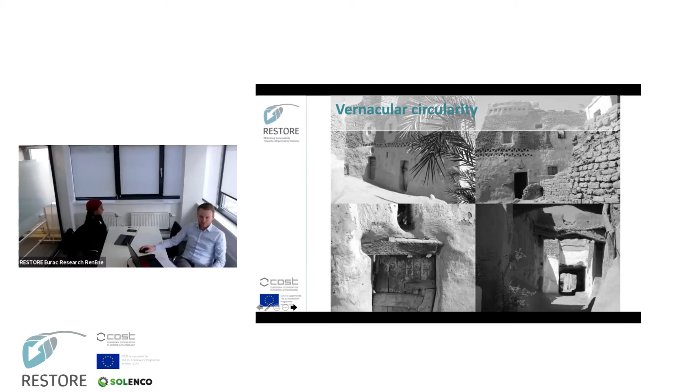in old times, people used to build with what exactly is there under their feet, as Hassan Fathy, the famous Egyptian architect, used to say. They used a lot of bio-based material from agricultural waste, from farm lands, in order to construct their buildings that along centuries proved to be economically also friendly and affordable to build, cope with the local climate, either it's harsh, hot climate or even harsh cold, if we talk about the Nordic context, for example.

The buildings were always designed to be able to be reconstructed again, even after demolition, or if it's the time for end of life of the building, or it is just deteriorating naturally. It is possible to reuse the material again. For example, in this picture, it's just an earthen building constructed out of mud brick, adobe bricks. If we demolish it today, tomorrow we can reconstruct it again from the construction waste. You use a little bit of water again to just remix the construction rubble, and then you will be able to cast again mud bricks.

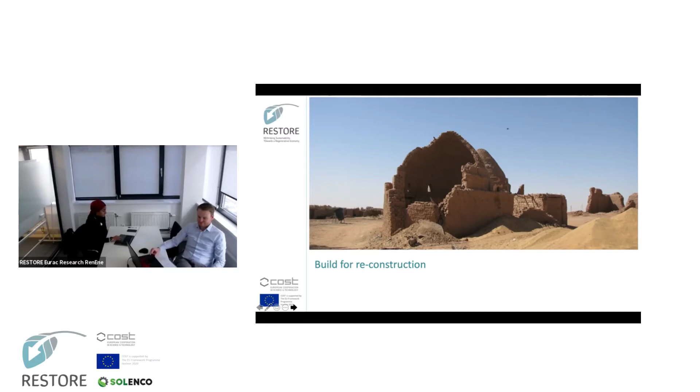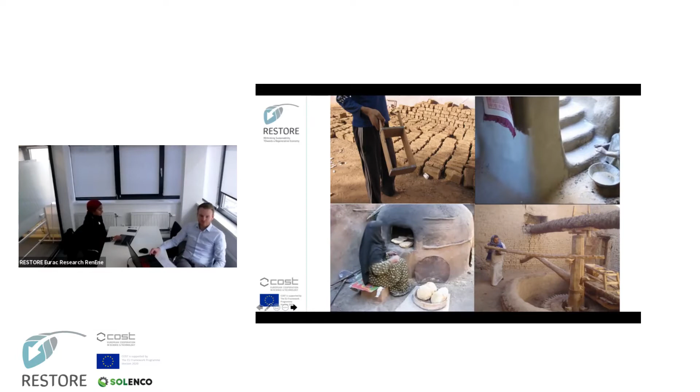So they gave us wonderful examples in old times on how we can recycle, upcycle, reuse all of our building components. And actually, the communities there were self-sustained, self-sufficient. They use what is available around them to carry on their daily living habits. All the building material, as we said, are resourced and brought from the local environment.

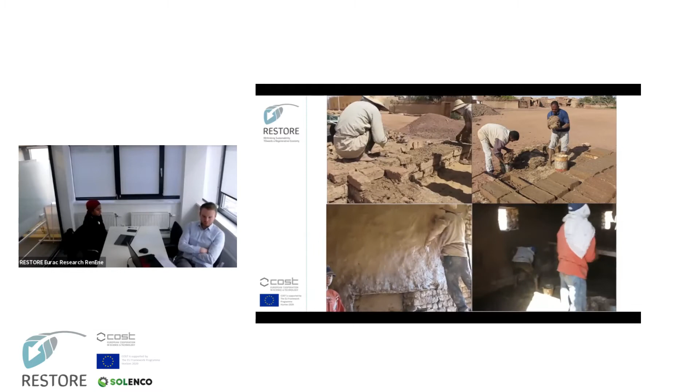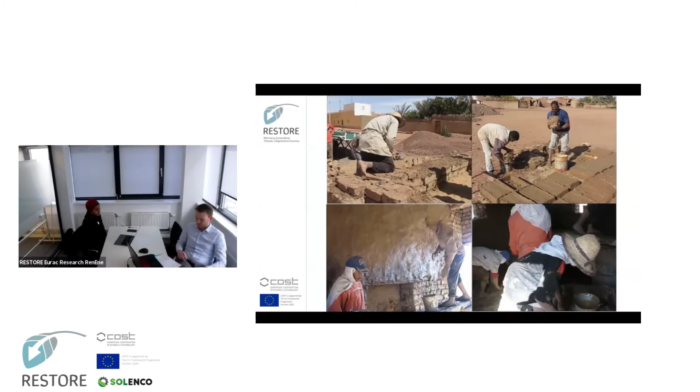As you can see here, it's somehow labor intensive, and that can be one of our challenges that I will talk about later. If you depend mainly on man hours, especially in the European context, I would say it's even more challenging in the Swedish context when man hour is extremely expensive. But here we can see at least the way that in old times, they used to construct their buildings, it's possible to reassemble and rebuild again. All the building layers is possible to, like when it's demolished, it's really possible to bring it back again to life as a new construction with the same basic raw material.

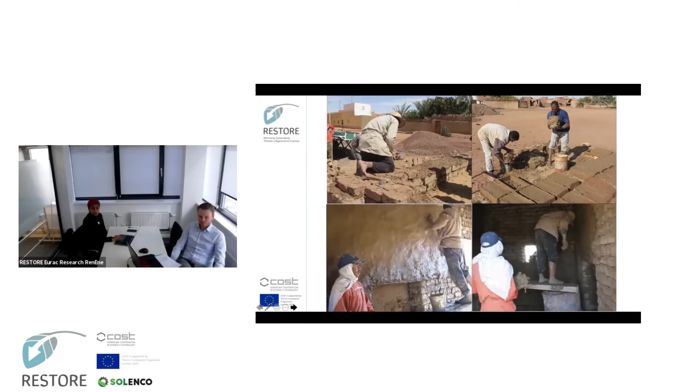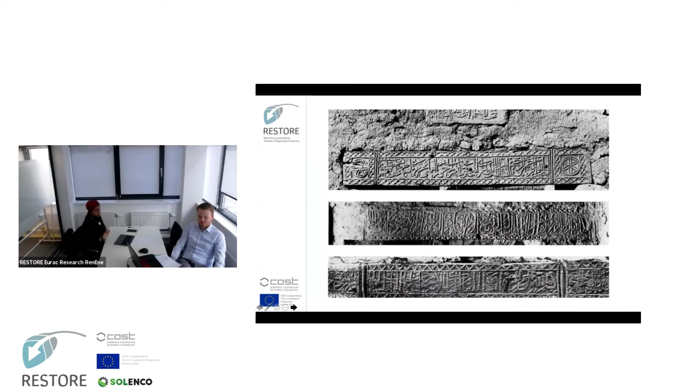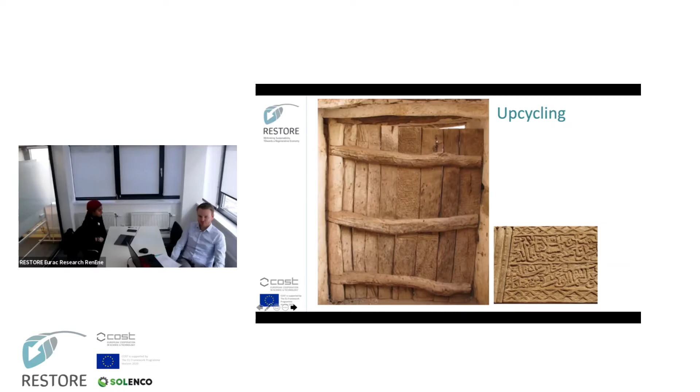So it's almost zero waste construction technology. When a building is about to be demolished, every single component can be upcycled in different ways. This is a very simple example: a door lintel. If it's possible, it can be reused again for the same purpose. If not, it can be upcycled in a different way, like using it to design a wooden door.

A palm tree, for example, is not just a source for food, for palm dates. It is a construction material. It can be used for primary beams, secondary beams for roof construction, for doors, windows, and supporting beams for walls or corners. It can be used for furniture, and even the leftovers from cutting and trimming the palm tree trunk can be weaved and used for different household elements. So definitely it's an example of zero waste thinking.

From one material again, this is just earth. You can construct a house, you can construct storage containers for crops to keep them fresh for a long time in different seasons. You can use it for interior furniture, for shelves, cupboards, built-in sofas and built-in beds. You can even make an oven or a cooker or different kinds of utilities.

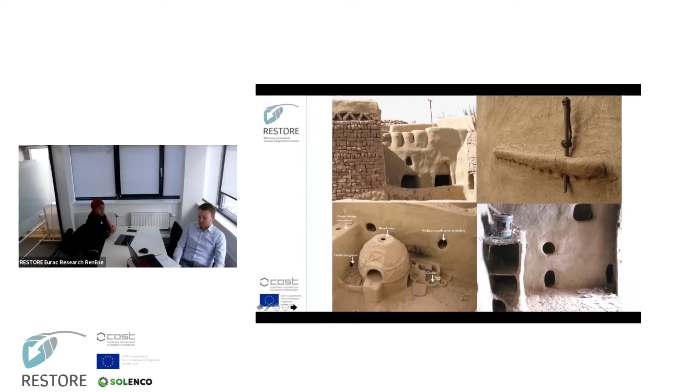A waste is not a waste. Organic waste in old times can be used not only as fertilizer for agriculture, it can also be used as fuel. This is organic waste or animal manure that can be used as dung cakes as fuel for furnaces.

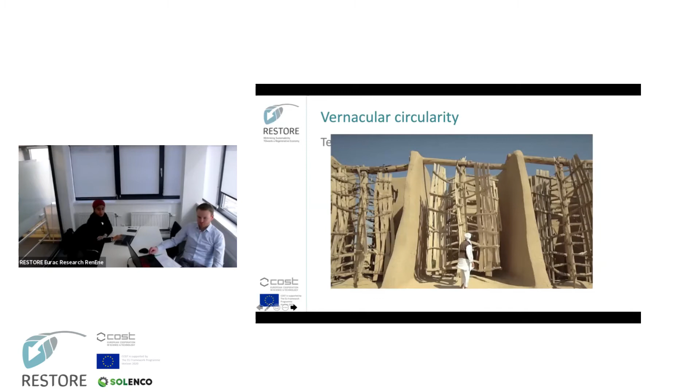When we talk nowadays about renewable energies and how we should use different natural powers to generate electricity for our buildings, in old times it shows us this kind of circular way of using natural powers, and this was the very initial thought for windmills and wind turbines.

But nowadays, we think a lot about design for reconstruction, design for rebuilding, and design for disassembly. But if we look at the enormous amount of construction waste that is already there, all the time we think of new, but how about the old, and how about existing buildings, and how we can reuse all this construction rubble.

Sometimes it's really hard to recycle. It's also a lot of energy consumed, a lot of embodied energy and embodied carbon still in reusing this kind of construction rubble or waste. Sorting construction waste is also time consuming and energy abusive. However, it's better than producing new material. So it's a little bit less bad, as we used to say, but we still need to do more good, as the slogan says here.

Since we started this event as a main objective for RESTORE agenda, so some ugly facts: unfortunately, in the EU alone, the construction sector consumes 1.6 billion tons of materials annually, especially steel, plastics, aluminium, and the biggest consumption is for cement. Of course, there are a lot of initiatives for producing eco cement or environmentally friendly cement, but still, if we try to minimize the use as much as possible, that's even better.

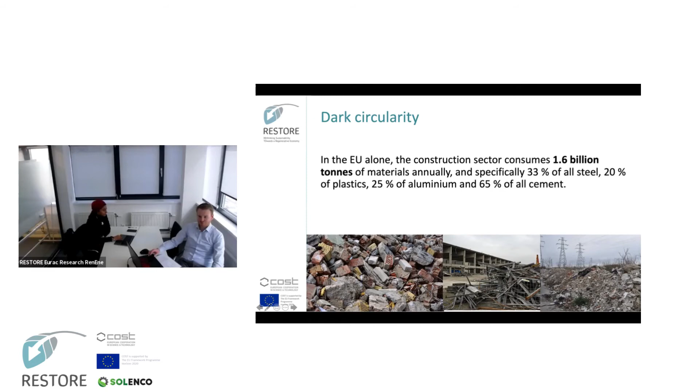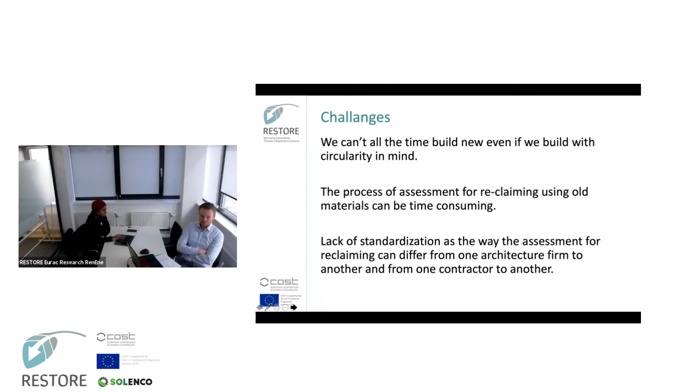So some of the challenges we still face: it's hard to build new all the time, we don't have this luxury. The process of assessment and reclaiming old material can also be time consuming. We still lack standardization, as the way to assess reclaiming material can differ from one architecture firm to another, from one contractor to another, and that also differs from one country to another. There's another challenge when it comes to building codes, regulations and standards. It's sometimes very rigid and really hard.

I will share a little bit now quickly about a recent project when I tried to build with straw, clay and reeds in Sweden.

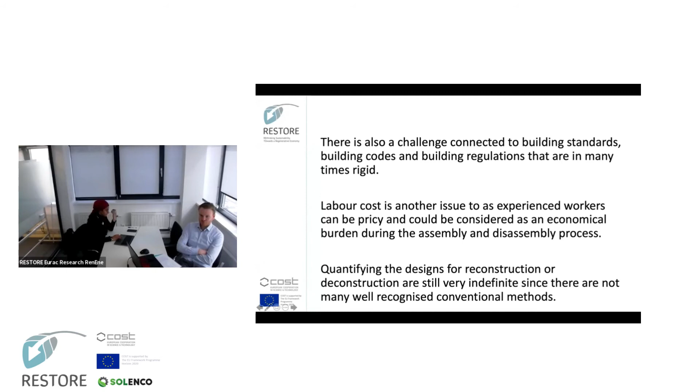Quantifying design for reconstruction and deconstruction is still sometimes a very indefinite sense. There are not too many well-recognized conventional methods for doing this. I'll also mention the labor cost quickly, it can be really costly if we depend on this kind of design for disassembly to reassemble our buildings manually.

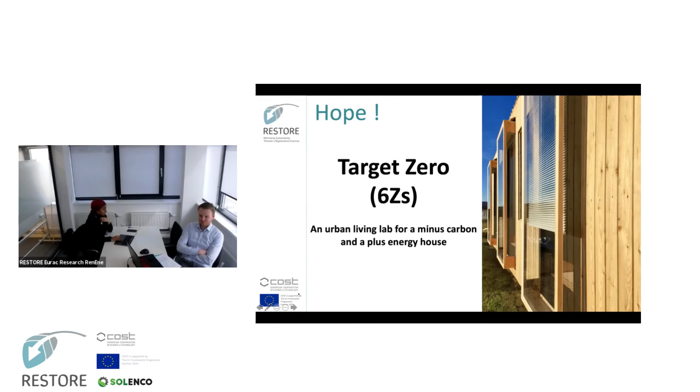That's a little hope at the end of the dark tunnel. With this, there's a small and humble contribution in designing. At that time I called it the 6 Z's target: zero carbon, zero energy, zero indoor air pollutants, zero cost if you do it yourself, zero impact on the environment after end of life, and zero waste as an outcome from this building.

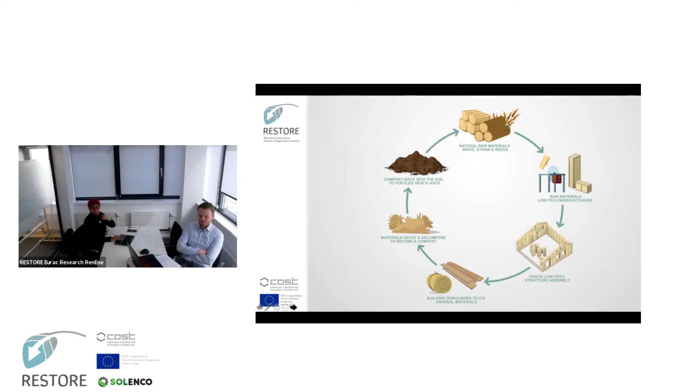So the idea is to use locally sourced material around the building site, earth, straw, reeds, and wood, to construct a refugee house based on the idea of design for disassembly. All the materials are sourced from the nearby farmlands at the project site.

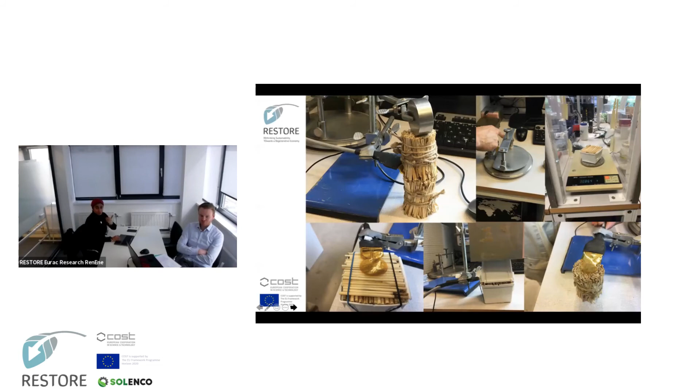A lot of lab testing has been done to make sure these materials are safe and good to use, because at that time I couldn't find any standards in Sweden that say you can build with straw and reeds safely, and how that complies with energy efficiency standards.

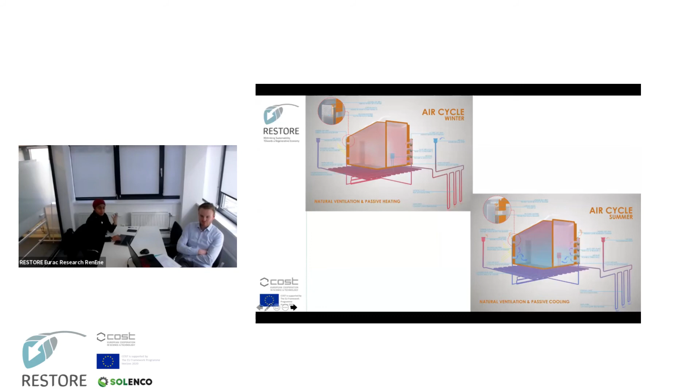All the passive systems in the house depend mainly on passive means for heating, cooling, natural ventilation, and daylight. A lot of passive systems were used, like trombe walls, green walls, and air heat exchangers. All the waste from the house is recycled.

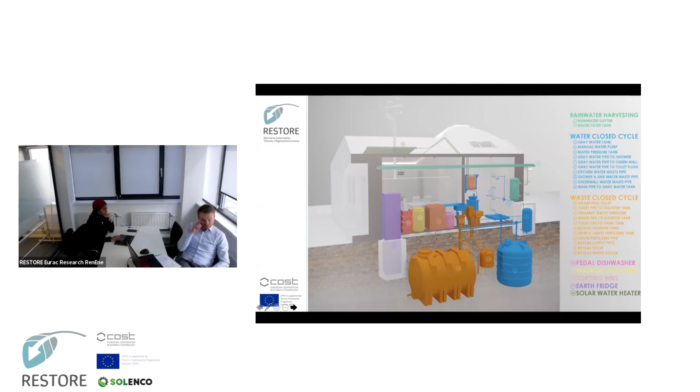The organic waste is used as biofuel. All the water is separated, gray water and black water, to be reused again for different purposes. Even if there is excess wastewater, it is treated and goes to the sewage system clean, even better than if it were just dumped in the sewage system.

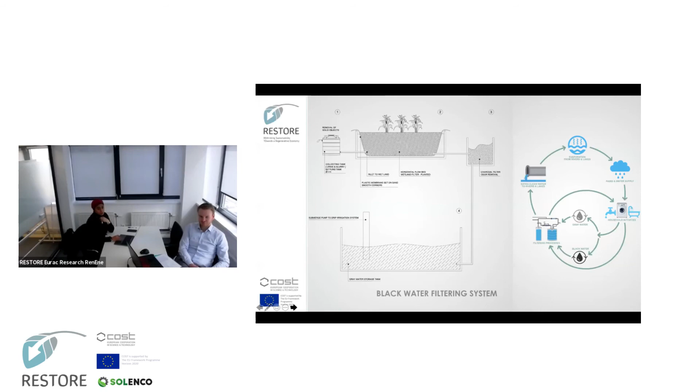In Sweden, we still have about 20% leakage in the waste system, so even if there is leakage, it's still kind of clean water to be used.

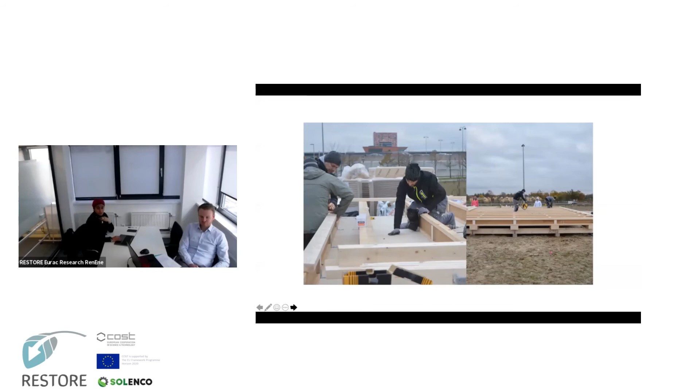And here's the construction process. It was done manually, only with screwdrivers, step by step like Lego pieces, to show that it's possible to design for disassembly. So you can unscrew all the building components.

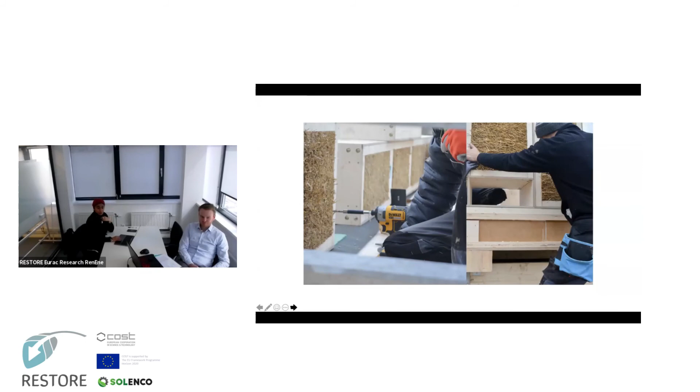It comes back as straw panels. You can use them again for the same purpose as construction elements, or you can just recycle the straw as material for animal bedding, or for food, or just compost or biofuel. And the plywood, of course, is easy to recycle as well.

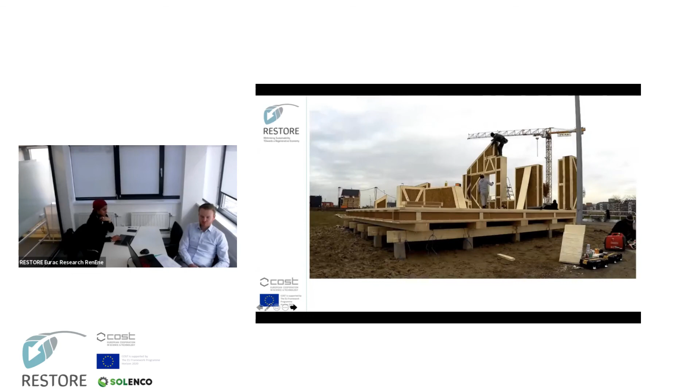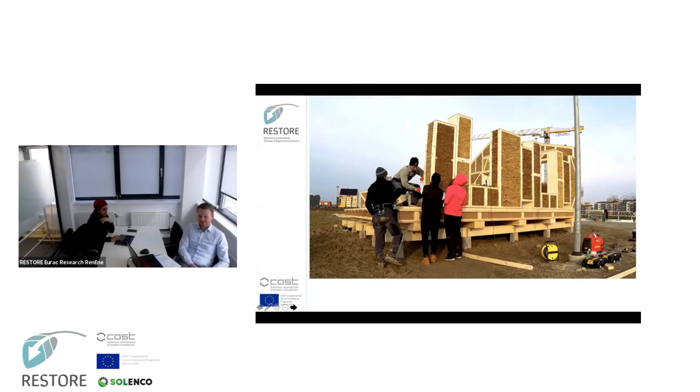So that wasn't our crane, that was the nearest project's crane. Everything here is just manual. It took, for this 40 square meter house, 1.5 working days. And the house was done mainly by amateurs.

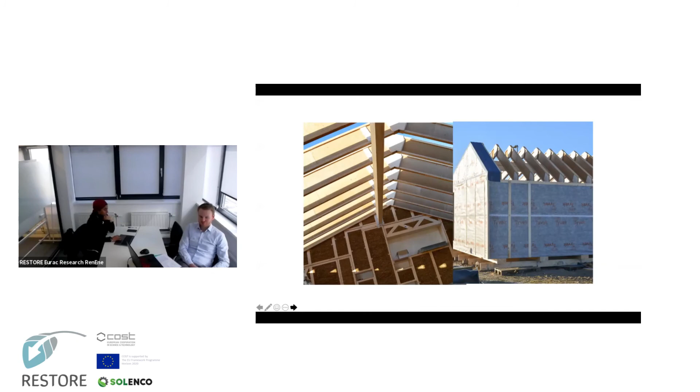You would just get training during the construction process, just to prove that it's possible to do it yourself and construct the house step by step in an easy design-for-disassembly manner.

I think I have only one minute left. Two, okay. So this is just quickly to show you the building process.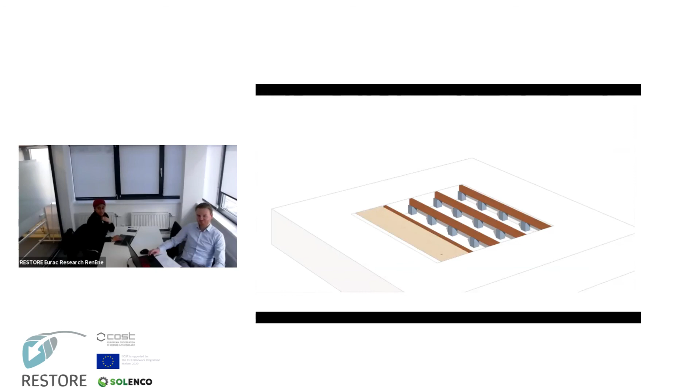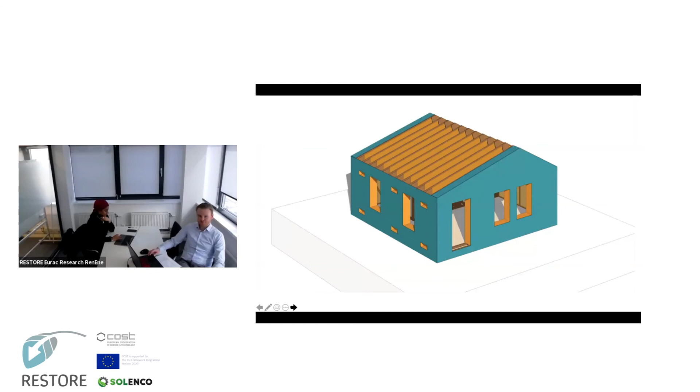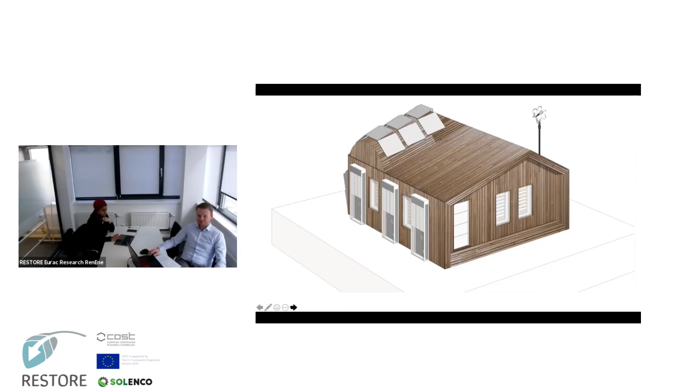So yeah, all the building components are installed piece by piece, even the passive systems, the trombe walls, the green walls, and even the renewable energy systems.

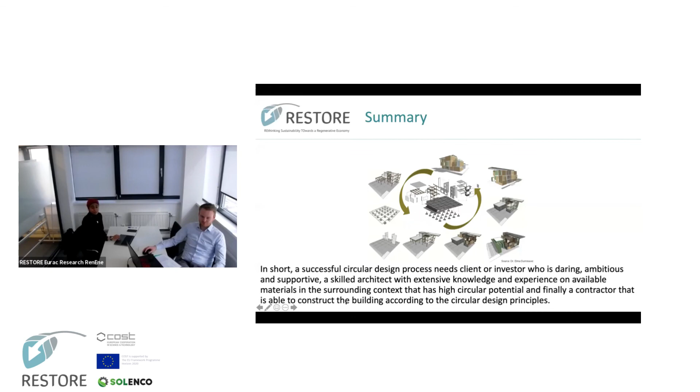To summarize, a successful circular design process first needs a client or investor who is daring and ambitious, but also supportive of the whole circular design process, and a skilled architect equipped for this kind of mission with extensive knowledge and experience on the available materials they could use, and also finding a contractor willing to invest in collaborating on building this kind of circular building. It's somewhat costly from the beginning, but the reward is even better.

To end, I would like to say circularity needs a strong desire and will for change, and active actors in the building sector really need to step in now, not later, because otherwise it will be too late. Thank you so much for listening.

Thank you so much, Marwa.